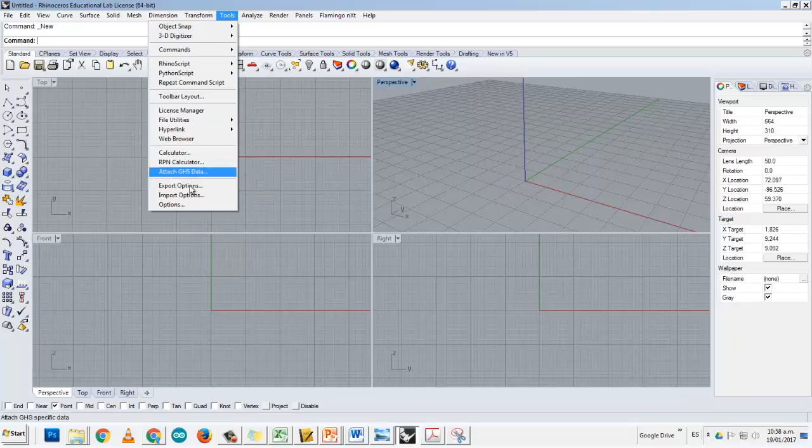Okay, so we're going to start with pulling out this z-axis. So we go to Tools, and we go to Options, and in Options, we can go to Wireframe.

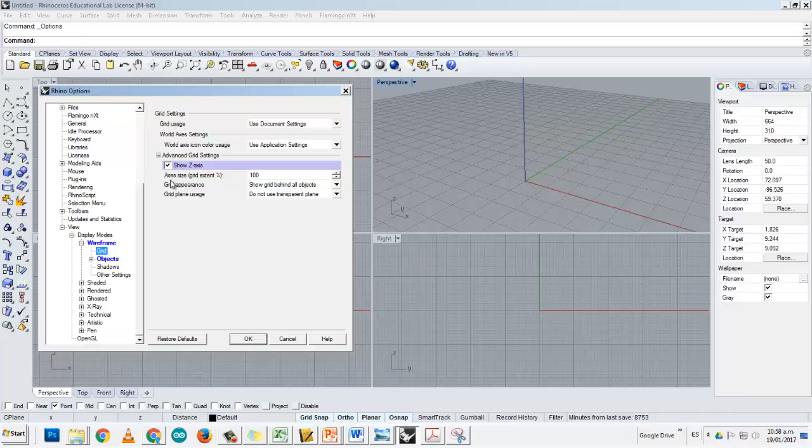Here are some options in display mode, options we can use to show different types of applications. If we go to Grid, we are going to activate and check 'show z-axis' in order to start working.

Okay, so now I have the z-axis, and it's going to allow me to see how things are located on my 3D plane. So what we're going to do is develop this model.

This is called a coupling. It's very important for connecting different axles to different objects, like a motor, or connecting a motor with a rod, or connecting a motor to a gear, etc.

So this is a coupling, and couplings have a couple of things that are very important: the inner circle and the outer circle. This inner circle has to be the size of the rod or the axle that we want to couple.

So we're going to start with an inner circle that is 8 millimeter diameter and an outer circle that is 12 millimeter diameter, and we need to extrude those two—I don't have it here, but it's 27 millimeters.

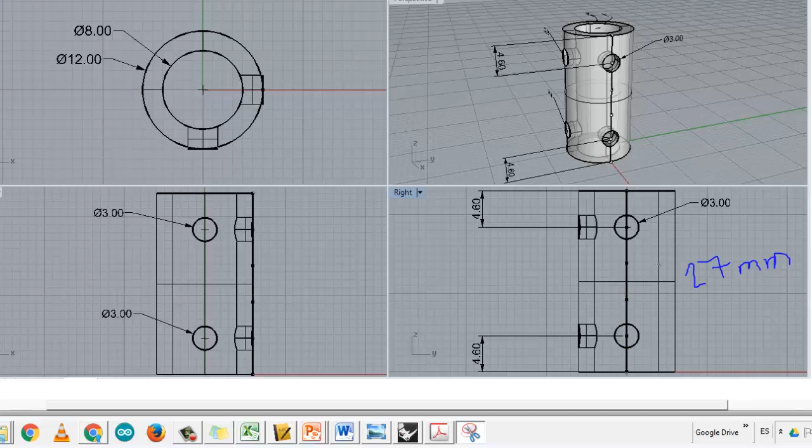Okay, so we're going to extrude this coupling 27 millimeters. So let's remember 8 and 12. We're going to start making our circle like we do—remember that these are large objects, in millimeters, just so you know.

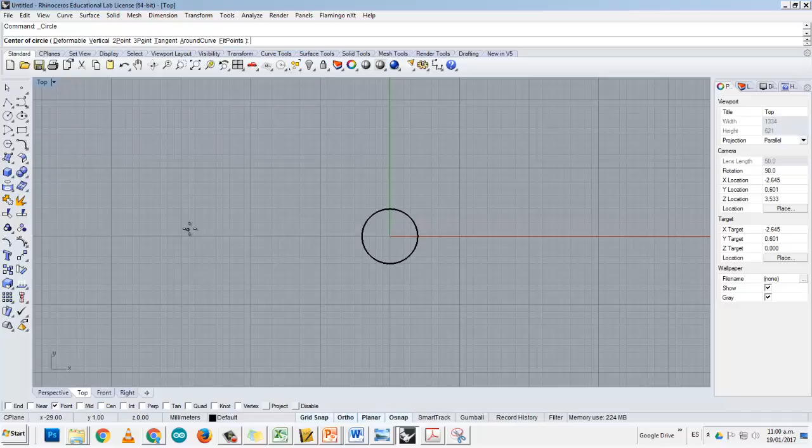I'm going to start on my top view, and make my first circle, which is a radius of 8, a diameter of 8, and then a second one. Remember, if I want to use the option that was just before, I can click enter and I'll have the option again. So the other one is 12. Here I have my inner and outer circles.

Okay, and I'm going to extrude those two 27 millimeters. I'm going to go to Solid, Extrude Curve Straight, type in 27—that's something we've done before.

Now I need to build 2 circles, which are going to be where I put my screws in order to attach the rod or the axle. Those screws, as you can see, have a diameter of 3 millimeters each.

One of them is going to be drawn on the front view, and the others are going to be drawn on the right view, and they are separated 4.60 millimeters from the top.

What I'm saying is, in order to do this, I created a line segment and divided it into 5 equal parts. That way I can have the same distance from here to here, and from the top to the other hole. So I just created a line segment, divided it into 5, and created my circles there. That's what I'm going to do.

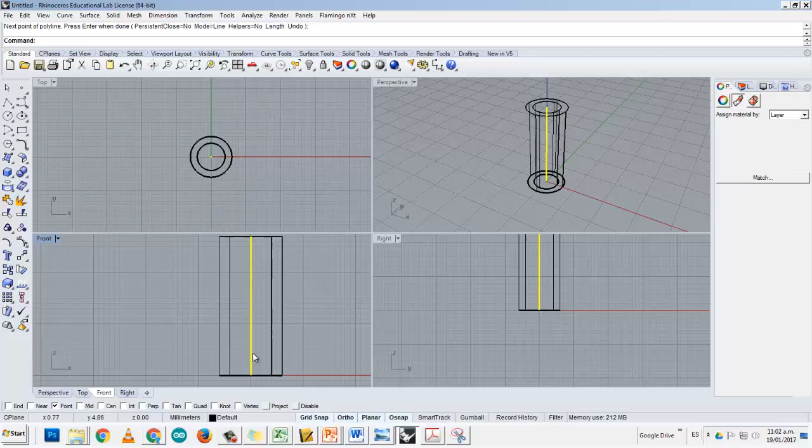Go to curve on the top toolbox or tool panel, and go to point object. In point object, it says divide curve by number of segments. I can divide it by a number of segments, so I want it to be 5. It can be any amount of segments that you like, and you'll get equal segments.

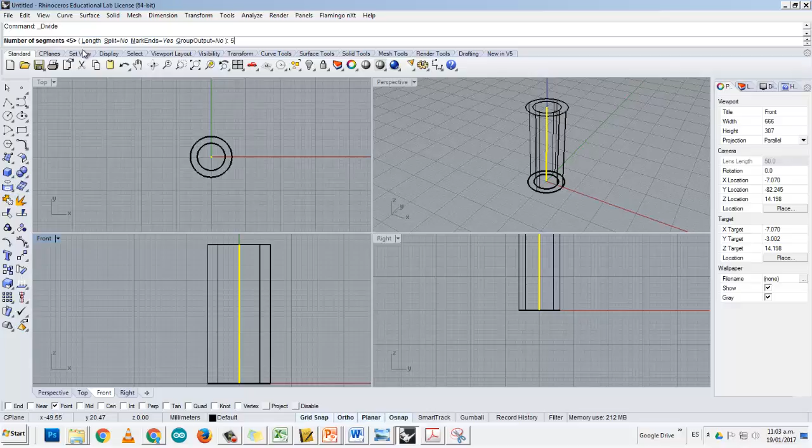There are also other options. You can split each into different segments, or just show the points. In my case, I just need the points to be shown. As you can see, on the front view and on the right view, I have my point segments.

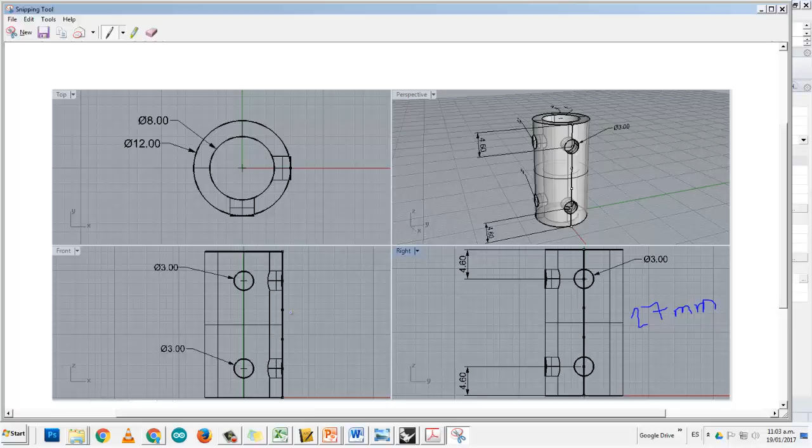What I'm going to do is activate my OSNAP or snapping options for snapping, and select point. Now I'm going to build my circles that are going to be attached to the points, which are 3 millimeter diameter. So 3, there goes 1. Then I'm going to make another one, 3. And then on the right view, I'm also going to build my circles, 3 and 3. So I have circles on the front view and circles on the right view.

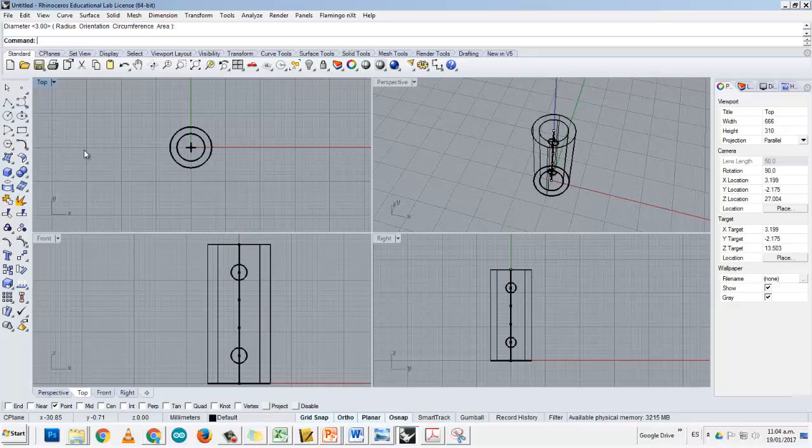Now what I'm going to do is extrude those lines. Extrude first the front view, and I'm going to make it bigger so it goes out of the tube that I made. I'm going to do it again, but with the right view, so I'm going to select the 2 circles on the right view and extrude them out.

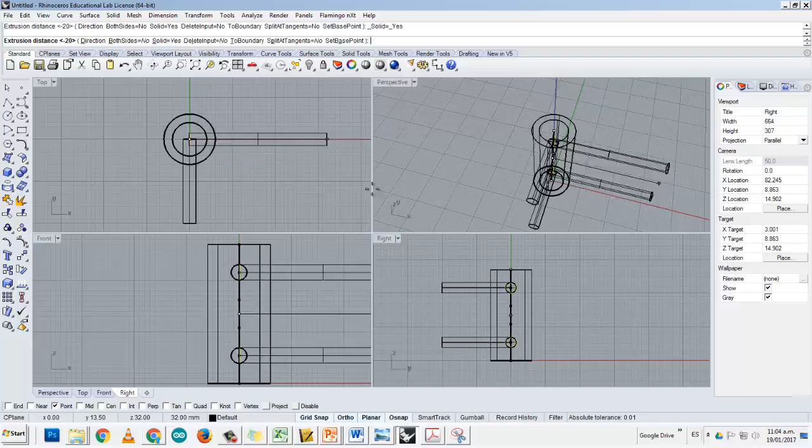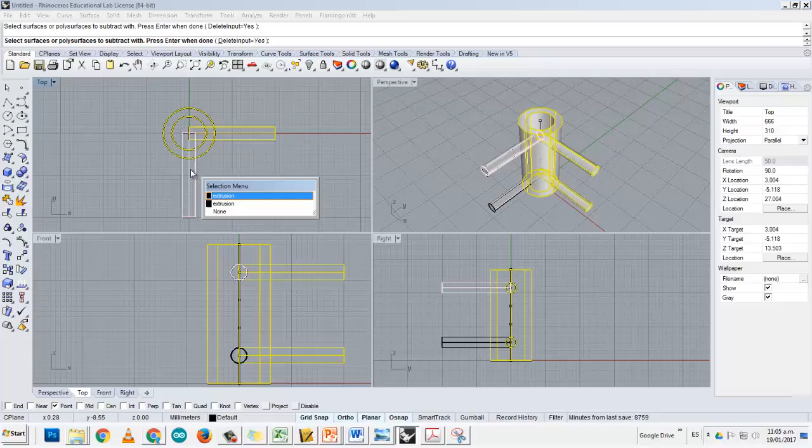There we go. Now, in order to make the holes, I just need to do a Boolean difference. Let me make this ghosted, and now I'm going to do Boolean difference: the tube minus all these cylinders that I created. There we go. So I have my coupling, very simple, and it's completely scaled to the original one, to something that actually exists.

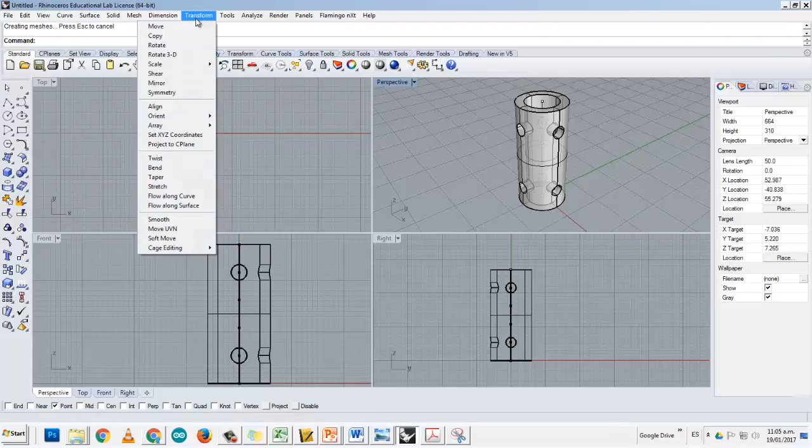Now the only thing we're missing is to fillet the edges of this coupling. So I'm going to go to transform, and I'm going to go to solid, fillet edge, and here's a couple of options. First of all, we can set the radius of my fillet. If you have a big radius, then it's going to fillet so much that there's not going to be any thickness in our objects, so we need to understand how big we want to do them.

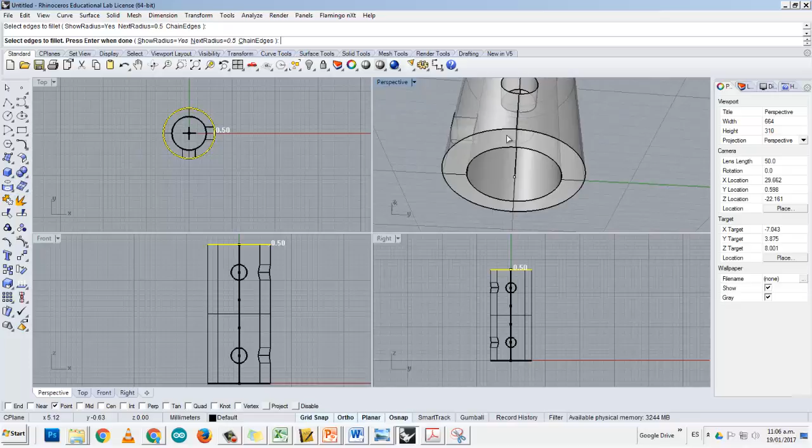In this case, since this is 2 millimeters, if I fillet 1 millimeter, it's going to take half of it away. So let's say I want to fillet half a millimeter. I'm going to put 0.5, and then I'm going to select the edges that I want to fillet. In my case, I want to select that edge and this edge, like the bottom part and the top part. Press enter twice, and I have my edges fillet.

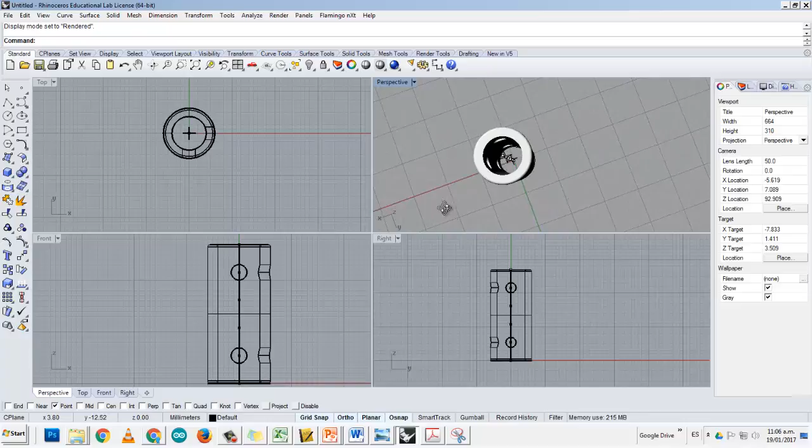Now I have a coupling that is a little bit smoother, so it doesn't cut if it's made on metal or if it's made on plastic. You don't want those sharp edges, so it's a lot better. This is how you make a coupling, and those are the 3 options that I wanted to share with you, so you can have a curve and split it and change all the dimensions.

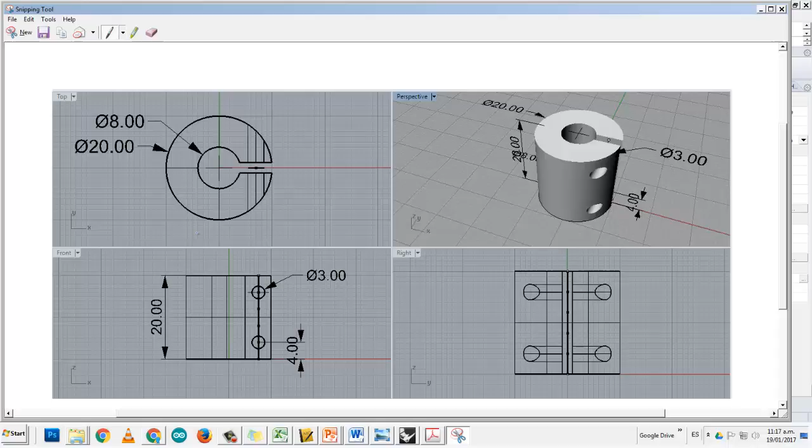Now what you're going to do to hand in is this other type of coupling. If you can see this coupling, it's not complete, and the way that you attach the screws is on the side, so that way with the screws you can actually tighten this up, to tighten the rod or the axle that you want to couple. This is another type of coupling, and this is the one you're going to do here, with the dimensions you need to hand in with the practice one. Make sure you have all the measurements and do it in large objects millimeters. Good luck.